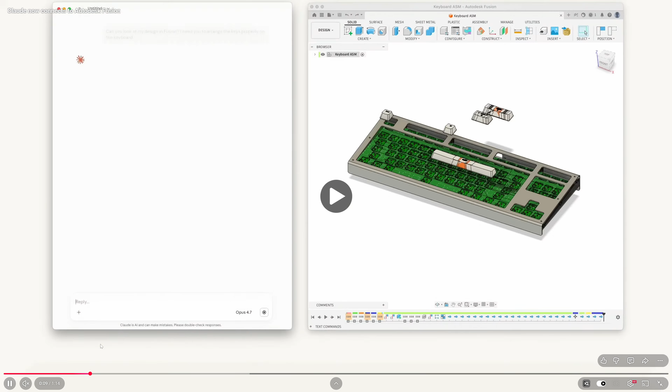So here you can see, first of all, Claude can directly integrate with Autodesk Fusion, which I'm going to show you step by step in this live stream in a while. And what it can do is you can simply ask it to do things like, can you look at my design in Fusion, and I want you to arrange the keys properly on the keyboard. And if you see the keyboard here, the keyboard assembly is quite complicated. I won't consider it as a very simple assembly.

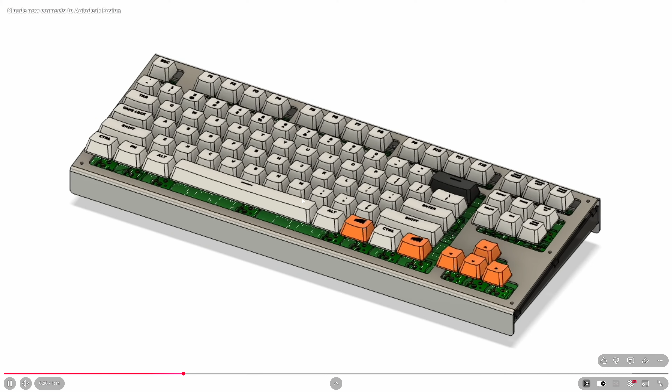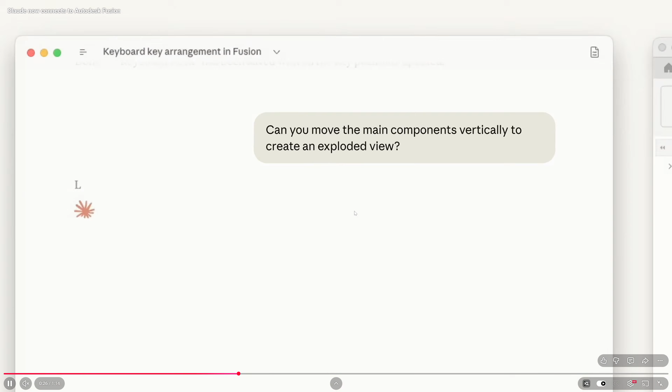And then here, based on what we ask, Claude is doing its magic and doing this assembly. And of course it can see your design. And then the next prompt was, can you move the main component vertically to create an exploded view? And Claude did exactly the same. So it knows where your component is in 3D space and can create this kind of exploded view. That's really awesome, guys.

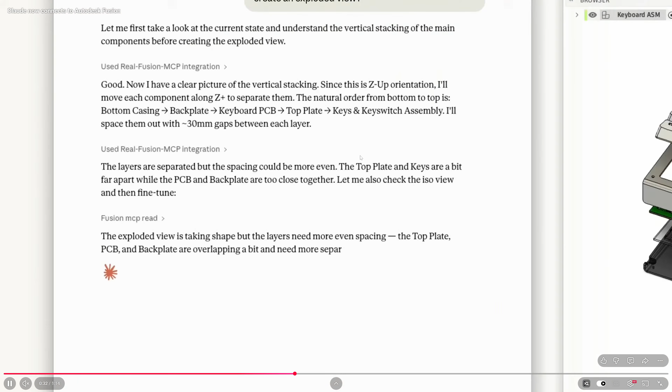And not only can it manipulate the existing geometry, but, as I'm going to show you in a later part, it can create geometry for you.

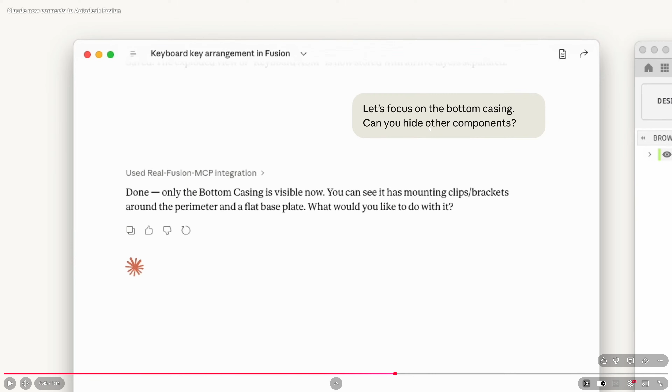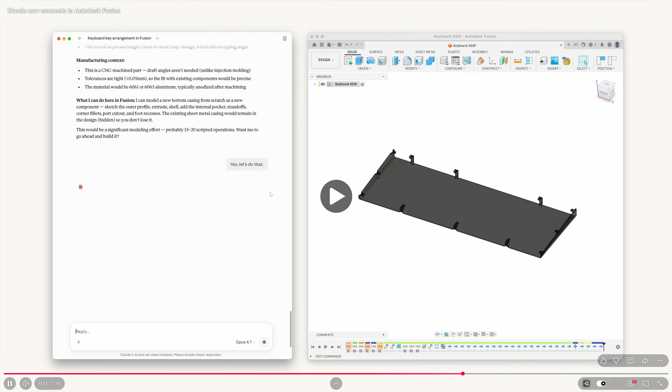So here again, it is asking to explore material and focus on the bottom casing. Can you hide the component? And it seems like it has done something, like changing the material. So that is the thing. And you can also see not only is there a change in material, but also a change in design from the previous one to the newer one, which now has got these kind of protrusions to connect. So that's the different one.

All right, so now again we need to see this KitBot ad.

Okay, so now I am going to show you step by step how you can achieve the same.

All right, let me see if my camera is back. It seems like it's not. Let me try reconnecting it. All right, just give me a minute, guys, I'm trying to fix my camera. I don't know if I'll be able to fix it or not, but no worries, we will be focusing on the main thing.

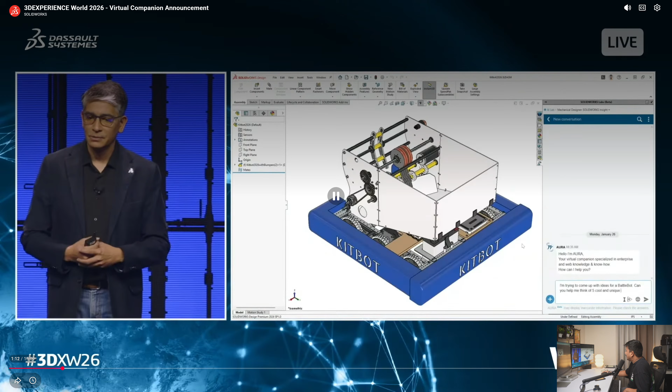Okay, so this is the AI now built into SolidWorks, where you ask a question like: I'm trying to come up with an idea for a battle bot, can you help me think of 5 cool and unique battle bots? You have one robot, you're trying to go towards a BattleBot—what can you do? You can explore options, search for inspiration, and test new directions without exposing your idea to the rest of the world. Your search stays yours, your creativity stays yours.

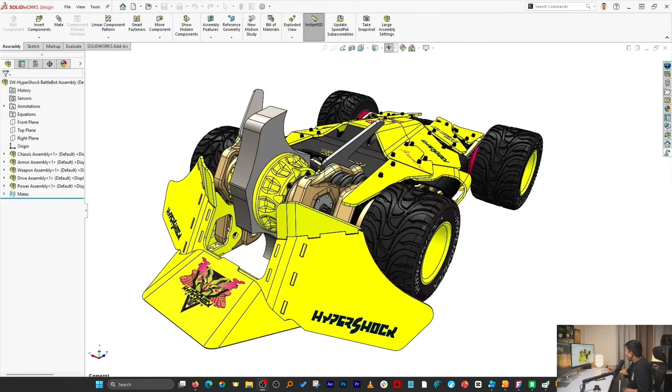Now, once the idea takes shape, the next challenge is turning it into something real—that's where Leo steps in. Leo is your expert guide that helps you. In this case, let's ask Leo to generate the assembly structure for the BattleBot to plan out our design. It gives you a starting point so you don't have to start from zero—it knows what components need to go in there. But you don't just have to take it; you can iterate with Leo, finalize it, and the moment you finalize it, you have the assembly structure. In future, we'll also be able to grab assembly components from your repository or suppliers, but today you're able to get the assembly structure.

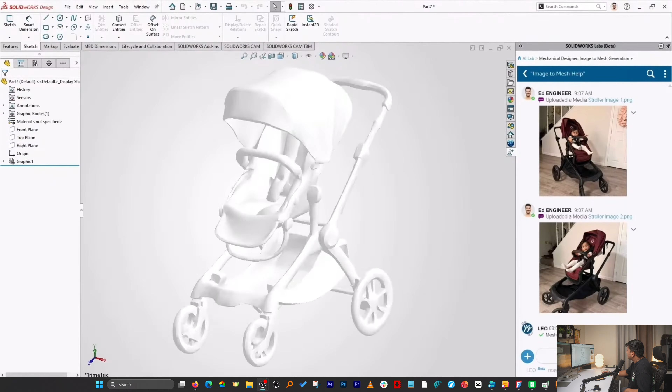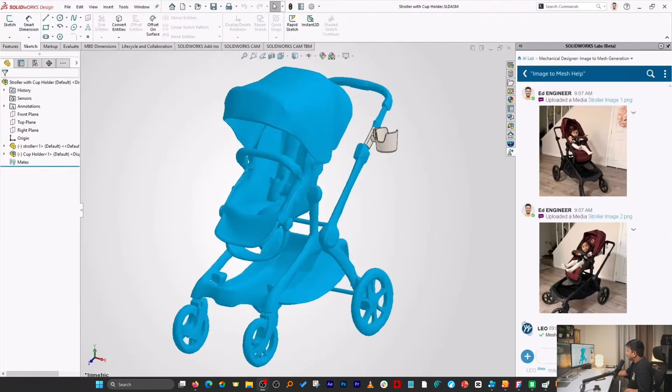Now, not every design starts from a blank screen—very often you're starting from what already exists. This story was inspired by a real scenario: one of our teammates, Priyanka, a mom, her toddler Kabir, and mom's need of carrying a cup. By the way, both mom and son are here—you might see them walking out there. With image to mesh, you can take an image and quickly convert it into a 3D mesh to provide context for building real things. In many cases, designs from suppliers are neutral BREP geometry, like step files—featureless, but the problem shows up when rebuilding the part from scratch.

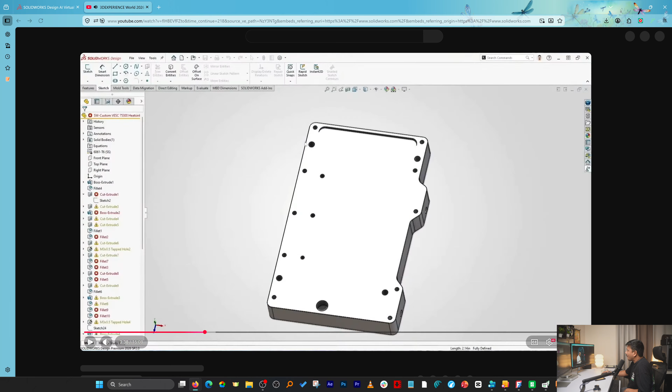All right, so maybe I can post this video separately since it's also from YouTube, and I can post the link in the description of this live stream.

And here you can see, meanwhile, what Autodesk has done for us—it is still designing this cup, reiterating based on what it came up with.

Sorry guys, to come up with a very different topic with the SolidWorks here inside Autodesk Fusion, because I wanted to save your time, since it generally takes time, to be honest. Even that SolidWorks video should also be taking too much time, just because it was already a polished video.

All right, let's wait for the whole thing to get completed. And here we can see the good thing about Claude is when it generates something, it tries to take a screenshot of it, and then try to find out what the bugs are. It has seen the bug, which was that the handle was not properly connected, and again it is trying to reiterate and fix it. So that's happening there, I guess.

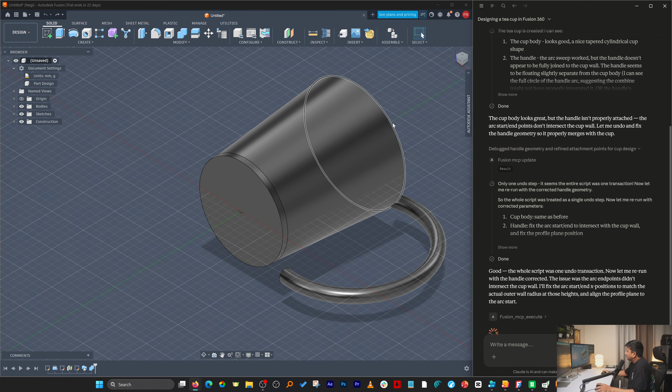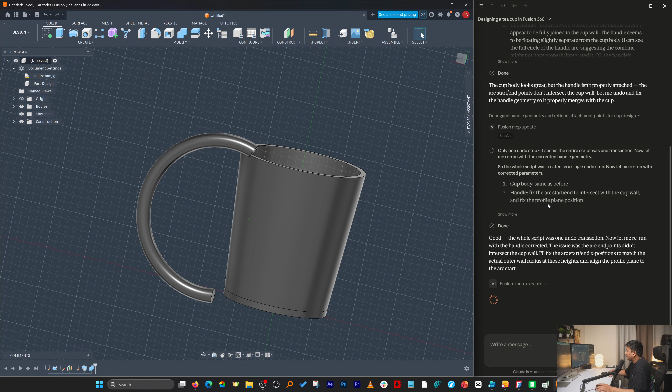And again it tried to create it back, and this time also here we can see the handle is not good, but you do not need to do anything. That's the beauty specifically about Claude, that it reiterates, it learns, and it tries to fix it, and it does everything automatically.

And if anybody has got any further question, feel free to ask. I am open till, you know, Autodesk Fusion plus Claude does this work.

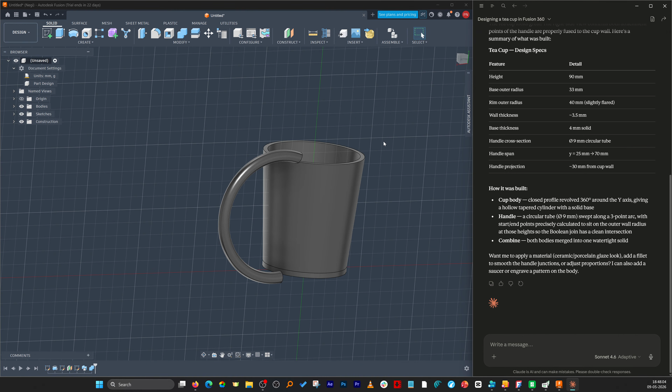All right, so seems like this is it. And I will not blame AI right now. It already has tried a lot, and in order to improve its accuracy, what we can do is utilize Opus. Right now I was using Sonnet. So if you use Opus, it's going to consume more credits, but it will create a better result. Now the reason why I do not go for Opus is because Opus consumes your credits very fast.

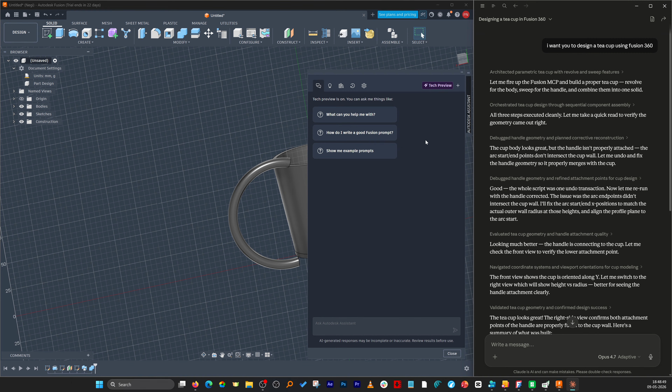And one more thing I wanted to show you: yes, of course, this is not a very good example that I created here. Consider if this assembly is very complicated, or there are a large number of parts. In that case also, Claude would have performed similarly. I mean, this is a very simple assembly, but even if the assembly had, let's say, 50 parts, it would have performed in a similar way. So it will improve not only for simple assemblies but also for very complicated assemblies.

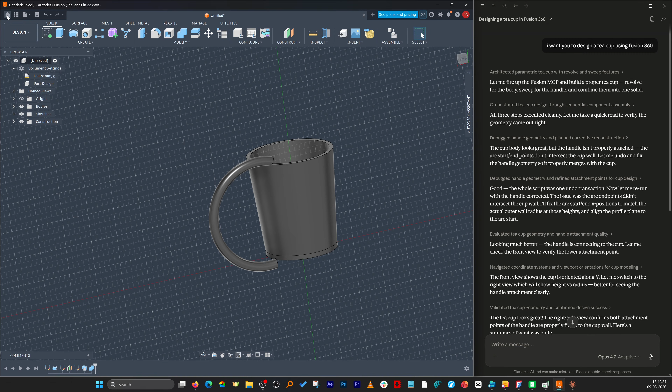Now let me close this. Of course, this is not a very good example, so this time I'm gonna go to assembly design, and maybe I'm gonna give it a more specific prompt this time. Here also I'm gonna create a new prompt, but let's this time utilize the built-in Autodesk Assistant, and this one is fast.

And you may also see some of my history where I have utilized this. All right, so from my prior experience, I can say this one goes faster. I'm gonna say, design me a water bottle having organic shape, height— maybe this time I'm gonna provide height, and I do have one bottle right now with me, and if I see, that bottle is around 350 mm.

Carrying capacity of, let's say, carrying capacity of 800 ml, and I'm gonna say the cap needs to be a quick opening cork style. Let's hit enter.

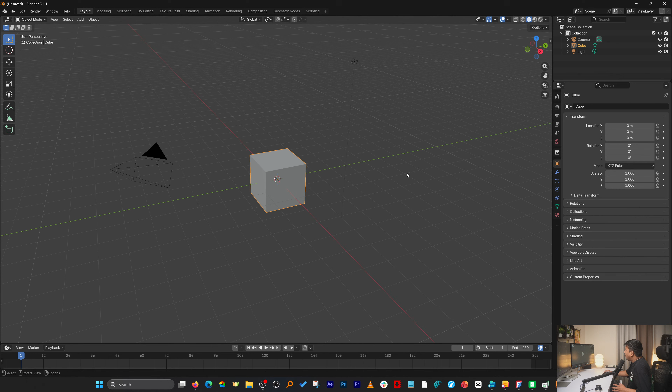Right now Fusion is utilizing the internet. I think Fusion has figured out everything. Here I need to say...

Yes, go ahead. This is really what I like about Fusion Assistant, because when we use Fusion Assistant, it always asks for permission, which genuinely, for any designer or who is doing any complicated work, is very important - that it asks you permission before simply building the things.

So this is its plan. It's going to create a water bottle body component, an organic spline revolve solid, and then a cork cap, which seems like it has already created.

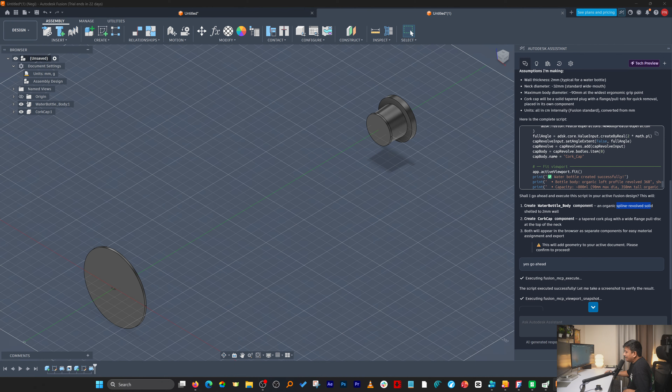Sorry guys, I'm switching topics in between. This happens when you do a live stream. And this is my first one, so I don't know.

Okay, so I am interested actually in seeing what's going on here.

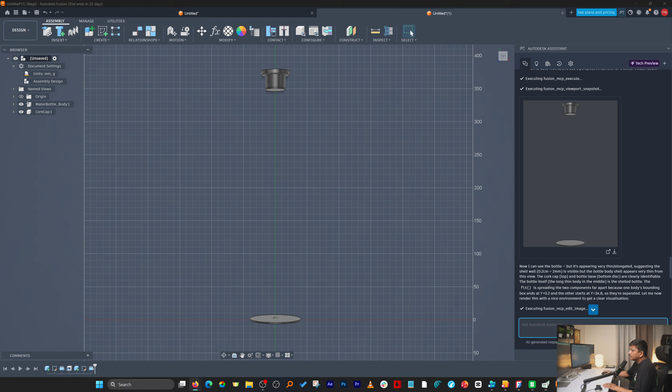All right, so seems like it has created the bottle, but to be honest, I can't see it fully. I'm gonna ask it - I cannot see the bottle, only the cork and end part of the bottle.

Maybe let me open this separately if I really need to do something here. Okay, so it only created this front and last part.

And seems like it has performed a shell operation, which split the bottle into two thin disk bodies, which is true.

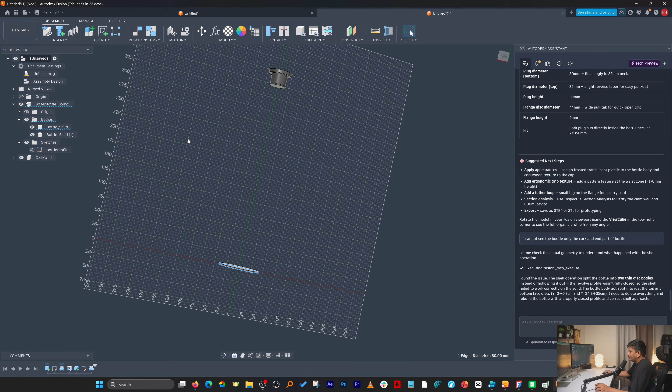Really, the wait paid off. So you can even rely on what you have written to the AI. Of course, I did not give enough information - I just said I need an organic shape - but the shape it came up with looks really awesome.

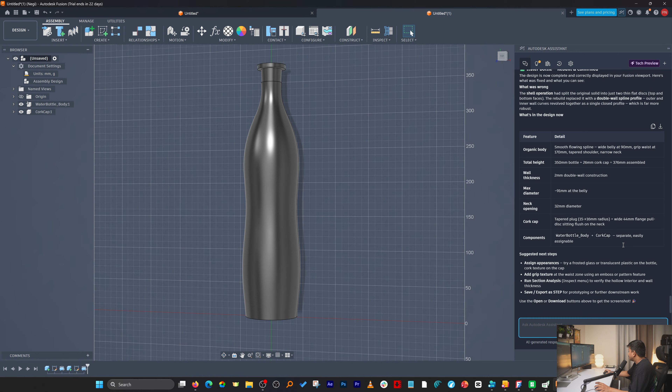And finally, our bottle is ready. Wow, it looks nice. And we have built this in assembly mode. Really nice to have, nice to see.

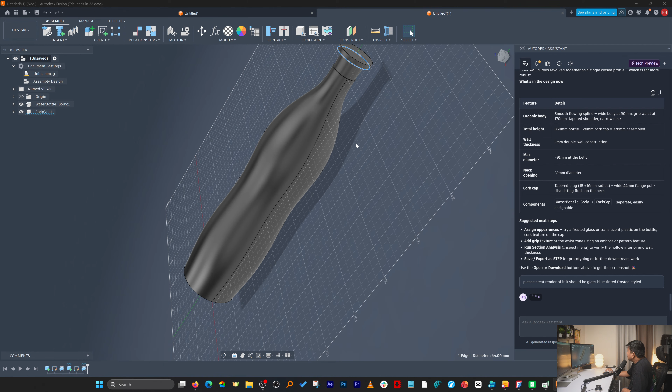I'm gonna say, please create a render of it. It should be glass, blue tinted - oh no, not translucent - I'm gonna say frosted style, with... okay, that would be enough. Let's see how it looks.

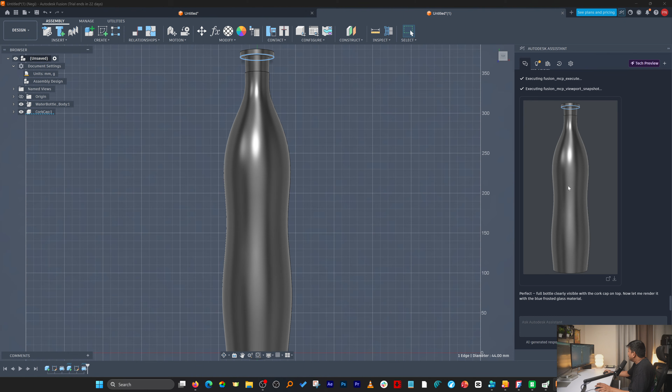Okay, seems like it's taking a screenshot of it, and now it's going to render it. So let's see how this rendering goes.

This will be extremely helpful and will encourage more and more members to be part of the 3D parametric software community, which was previously kind of owned by a handful of designers or hardcore hobbyists. Now as things progress and AI makes these software easier for everyone, we're gonna see this community grow exponentially.

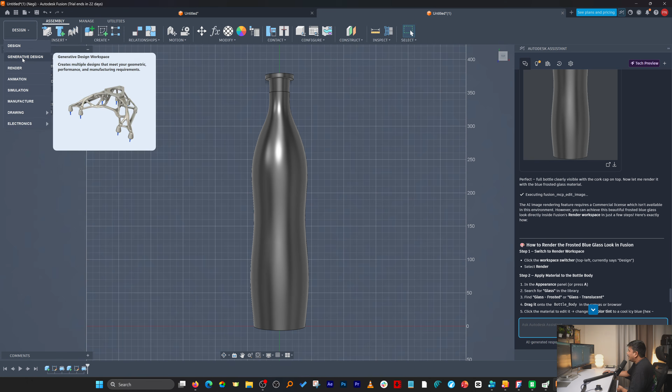All right, so it is giving me a tip actually, what I need to do. I need to first of all switch to the render workspace, and now I need to apply material. Can you do that? I'm gonna ask - can you do that? I switched to render...

Workbench. Okay, now we're going to do the remaining thing. That's nice.

And this is literally front view. I'm gonna ask AI to have it in isometric.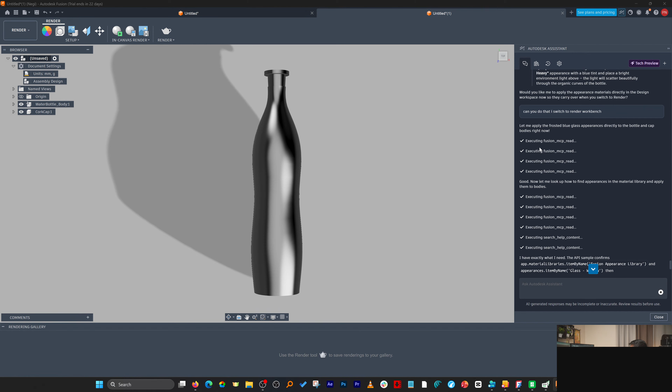Now these are the things which I think newbies, or who are just coming from AI, will struggle with, because this is just a tool, and what makes a product more feasible is when we conduct DFM, or when we really understand the functionality, fit, function, as well as the environment where the product is going to work. So that's engineering, and whoever will be part of this, because empowered by AI, they need to understand all these things. They also need to understand all these very standard terminologies. For example, isometric, that's very basic.

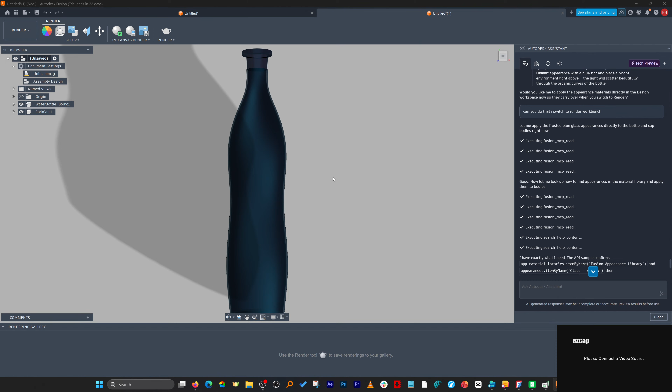All right, so let me hit home here, and seems like with that it doesn't look good. Okay, this is what I wanted to see, but seems like the home view or the isometric view is not good. All right, so here we go. Here we can see this is what we wanted and it is achieved.

All right, so if anybody has any question or wants me to do something, please let me know, or else I'm gonna switch to Blender now. I'm gonna wait for a while.

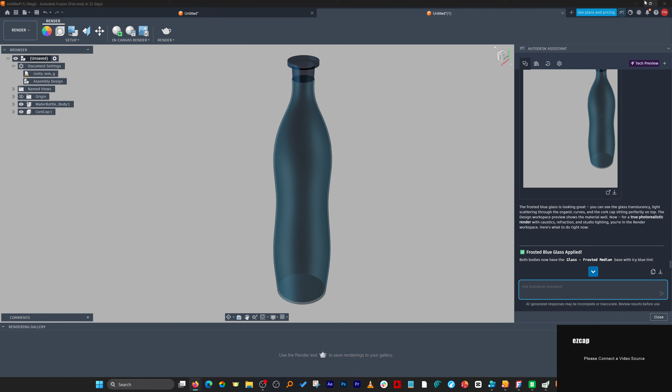All right, so let me now move toward Blender. And there you go. Let me put Blender here, and I'm gonna put Claude toward the other side.

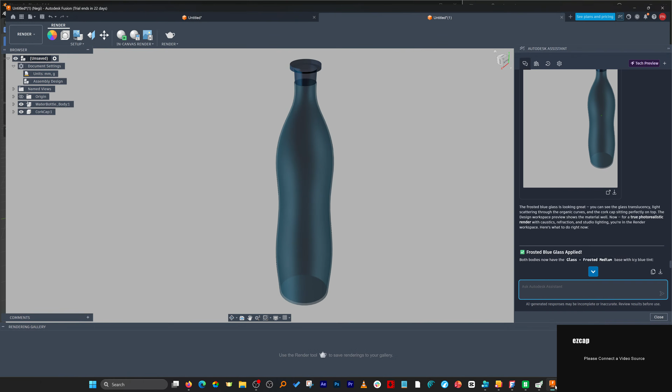Okay. Now let's go back here. I'm gonna ask the same thing, create a bottle. Maybe why don't I simply copy the prompt, and literally you're gonna see how both of these came up.

I really like the bottle created by the built-in assistant. And now let's see how it happened. Should we use Opus? No. Let's use this.

Okay, and design me a water bottle in Blender. Okay, that's important.

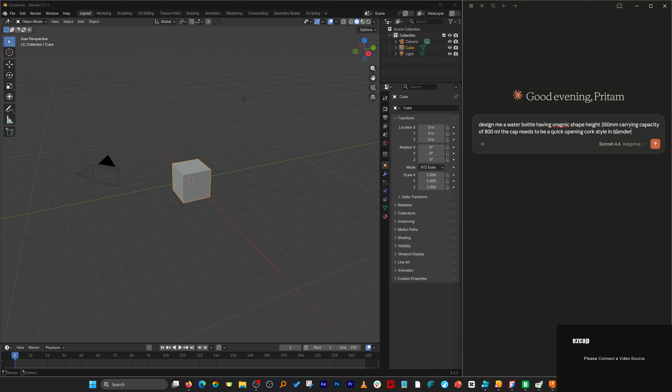Now let's wait for a while till it creates. Now, meanwhile, it creates the bottle in Blender.

Let me talk about my favorite 3D parametric software known as PTC Creo. And did Creo come up with this capability? The answer, of course, is no, because generative AI became popular now. But yes, if we talk about use of AI in CAD, it has been happening since, I would say, the past. For example, topology optimization or lattice generation. All these are AI capabilities that used to exist in all different 3D parametric softwares.

Now, let me type here. Okay, Creo parametric. Maybe they came up with something. Parametric. Yo.

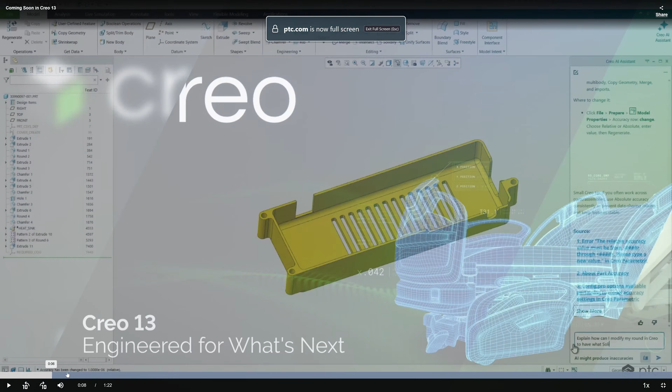Okay, so here Creo is trying to show the complete capability, not only focusing on Creo AI assistant. And let's see, because what we have seen here is it is guiding that these are the tools, but we want it to be more automated. Then you let us know step by step, and then we are clicking on it. And sometimes steps can go wrong as well. So let's see how it develops.

Okay, now let me go back here in Blender. And seems like the bottle is becoming even more interesting here, because it has built up a really nice, I would say, cork, and now trying to fix it.

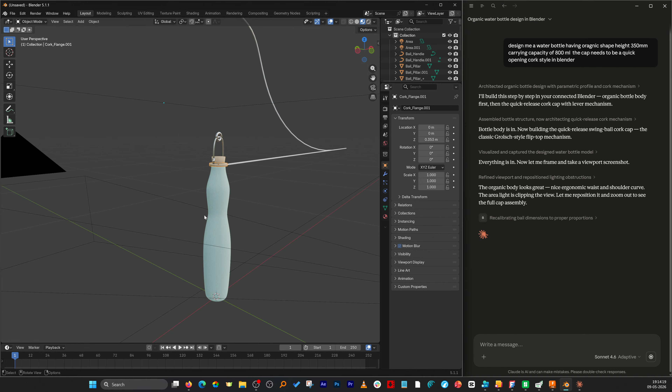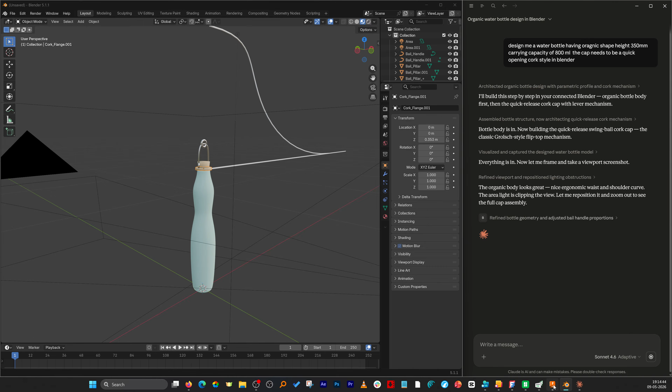And if we talk about the shape of this bottle versus the bottle created by Fusion 360, they look almost the same. But to be honest, I a little bit like the bottle designed by 360, but maybe Blender will also further improve. Let's see how it goes.

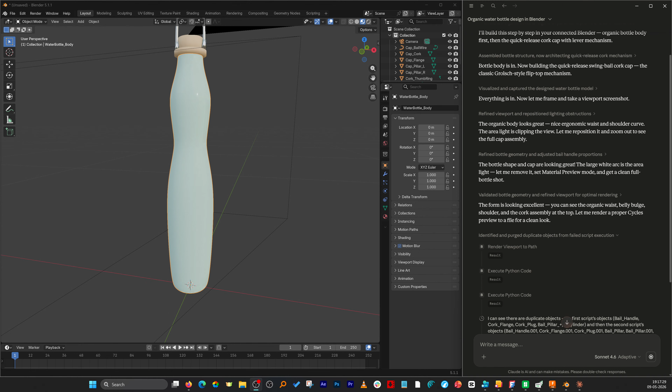All right, so seems like we can see the bottle is almost finalized. And this one also looks great. All we need to do here is further ask AI to modify it if we want to make further changes in optimization.